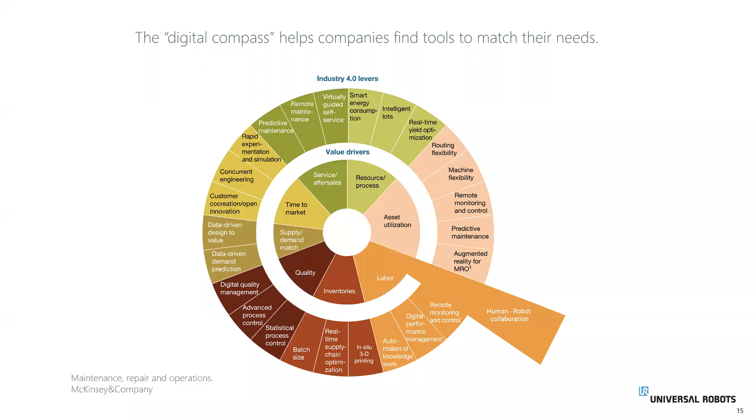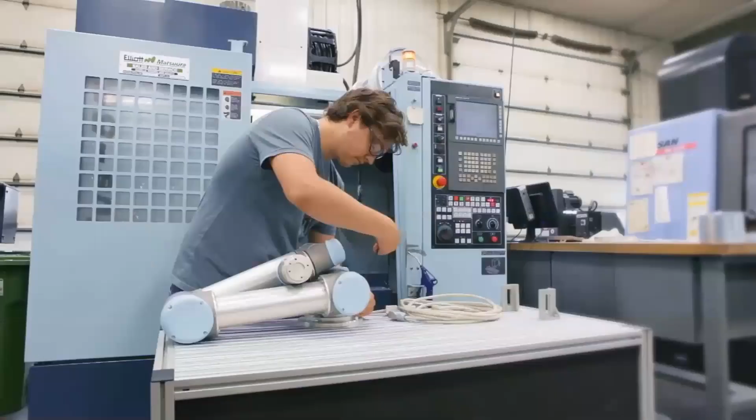Four bolts are required to mount the arm. These lightweight arms can be mounted on a wall, upside down, from the roof, or on the machine itself. A single cable runs from controller to robot base, providing power to the joints and communication. The controller operates on single phase power. You can select a range of end-of-arm tools readily available, as well as customized tools.

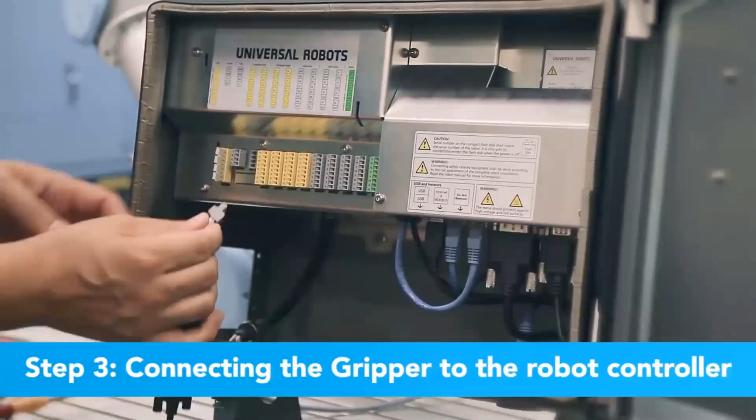The user interface is called Polyscope, and it is so user-friendly that anybody who can handle a smartphone can learn to use the collaborative robots. Easy hand-guiding based teaching, ready-made application wizards, easy navigation of menus, different access for operators and programmers, and safety auditors make the application safe to use.

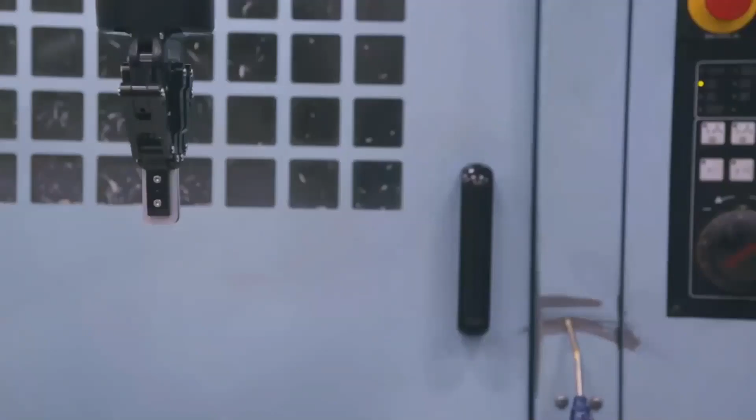So this video has given you a fair idea of how much time you need to implement a collaborative robot for a typical application like machine tending.

So when we say collaborative robots, you may have a question of what exactly we mean. Basically, cobots were created to share the same physical workspace as a human being, because cobots facilitate the idea of human-robot collaboration. The International Federation of Robotics defined 4 different levels of collaboration with robots: first is cell, second is coexistence, third is cooperation level, and fourth is responsive collaboration.

Let's take the first one, cell. This is the lowest level of collaboration, where a traditional robot is fenced off from humans and operates in its own separate workspace. Coexistence is the next level, where a robot is not fenced, but the human and robot both operate in their own dedicated workspace.

In the third one, cooperation level, robots and humans work on the same part or machine at the same time, and both are in motion. At the highest level of collaboration, which is responsive collaboration, the robot responds to the worker's motion in real time. Typically, traditional industrial robots can only work at the lowest level, while cobots allow for the highest level of truly collaborative applications.

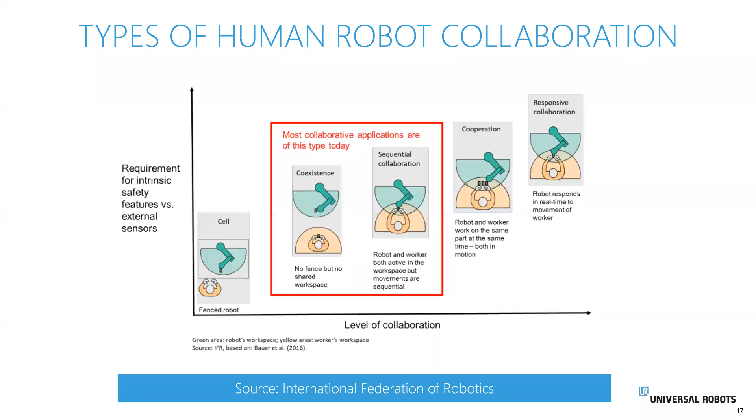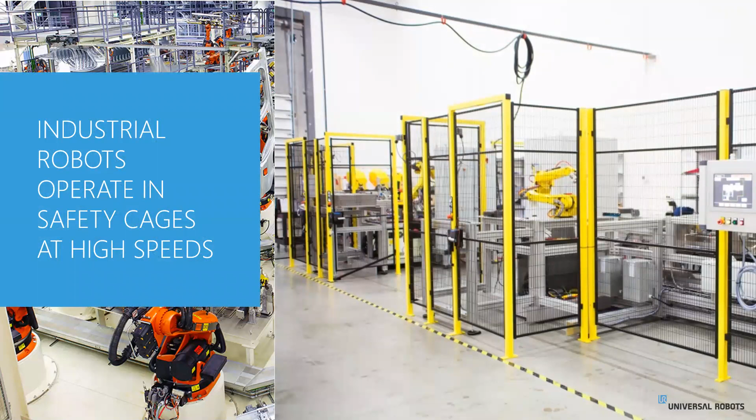As you may already know, these are traditional industrial robots. If you compare these to the cobot you saw in the video, you will notice a lot of differences.

First and foremost, you will notice that industrial robots operate in safety cages. They are bulky and take up tons of space on the shop floor, so you can only deploy them if you have space. Another aspect is user safety. Industrial robot cells are surrounded with safety fences, but men still need to go inside whenever a changeover or maintenance activity is carried out, and there itself the risk is present. Most accidents with robots happen when human activity is performed inside the cell, but this is not the case with cobots.

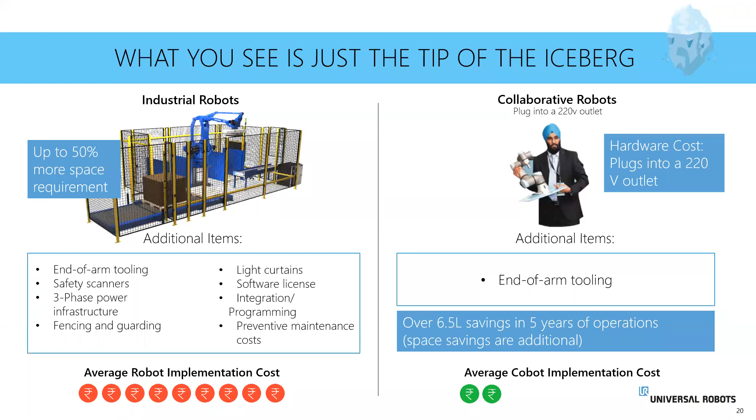As far as standards are concerned for collaborative robots, the only standard from ISO is ISO TS 15066, which is still a technical specification. ISO standard 10218-1 and 2 defines 4 different methods to achieve collaborative operation using industrial robots, and ISO TS 15066 defines the standard and guidelines only for collaborative robots. Going forward, ISO TS 15066 will become 10218-3, which is the industrial robot guideline for collaborative operations.

There are 4 different methods used to achieve collaboration using industrial robots. The first method is safety rated monitored stop. A traditional robot is used within a fence. When a person enters, the robot is paused. When the person leaves the workspace, the robot can resume automatic operation. Calling this method collaborative seems a bit odd, but the standards define it as collaborative because electricity is maintained to the robot motors while a person is present.

The second method of achieving collaboration is hand guiding, as part of the robot operation. The car industry has used this method for years to place seats inside the car and to hold bumpers while operators are doing screwing.

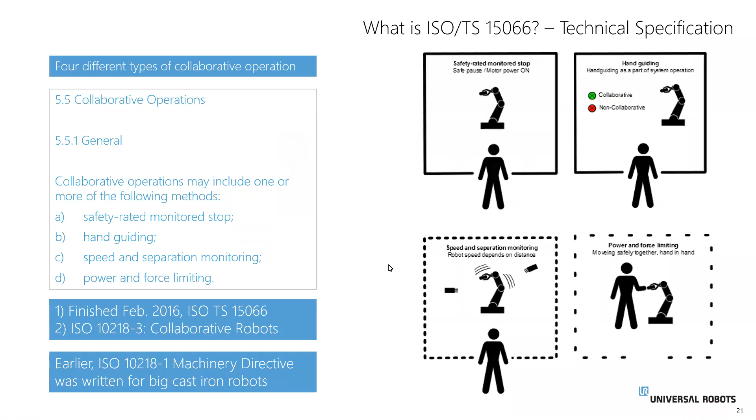Other than the ISO TS 15066 standard, UR cobots have a patented adjustable safety system which allows work at ease in collaborative operation. Functions like joint speed, joint position, TCP position, tool orientation, force, momentum, and power allow risk assessment of any kind of application.

The Universal Robot Safety System is tested in accordance with ISO 13849-1 Performance Level D and CAT3 architecture. All applied standards and certificates can be found in the user manuals of Universal Robots and on the website as well.

From the product line, Universal Robots come in two series, CB3 and the latest one, E series. CB3 has three models, UR3, UR5, and UR10, where 3, 5, and 10 stands for the payload capacity of the cobots. Whereas E series has 4 different models with an additional robot with 16 kg payload, which is UR16E.

E series has improved sensitivity with built-in FT sensor for process applications like polishing, grinding, deburring. Also, there are some other additional functionalities added in our latest generation of robots, which makes robot deployable for different variety of applications and also enhance the experience of the user in terms of easy navigation.

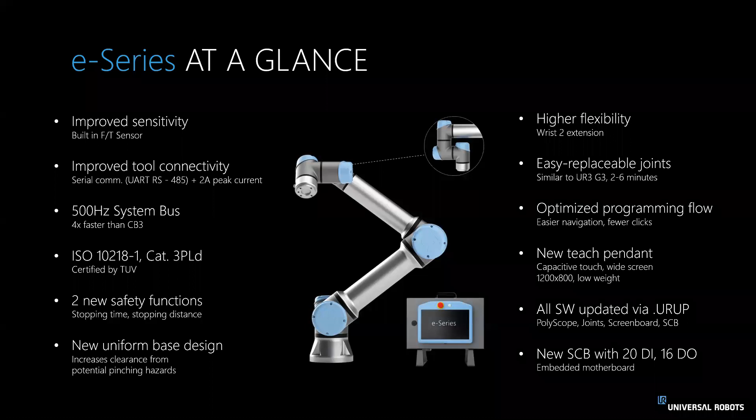17 built-in safety functions with stopping time and stopping distance functionality. And there are some other functionalities in terms of maintenance and application deployment as well. Universal Robots has set the standard for collaborative robots with fast setup, easy programmable robots, collaborative safety, and flexible deployment.

Let's see a short video on each of these for better understanding.

So you already have seen the setup video for Universal Cobots. Our cobots come in 2 boxes. One box contains the robot arm and the other one has the controller box. It takes approximately 1 hour to unpack the cobot, mount it, and program it for a simple task.

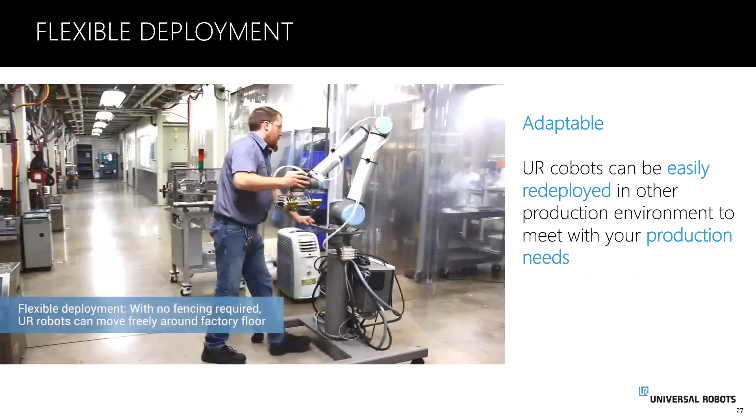You can see in this video how UR cobots can be easily redeployed in other production environments without changing the layout of the shop floors. This company has a fleet of mobile robots mounted on trolleys.

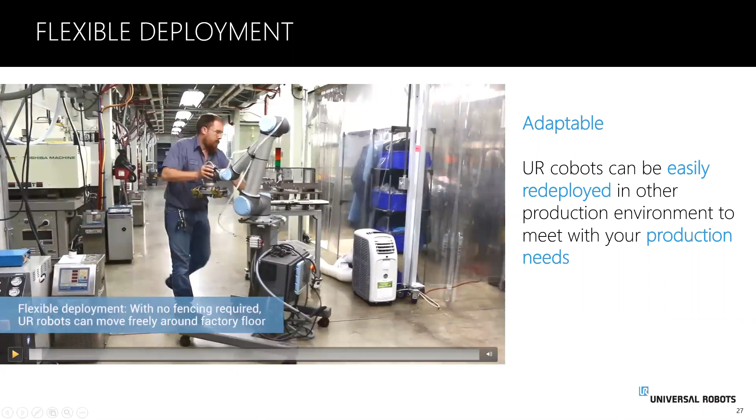Let me play this video once again. So this is the type of redeployment this company is using, mounted robots on the trolley system, and they are moving the trolleys wherever they want to deploy the cobots in different manufacturing setups.

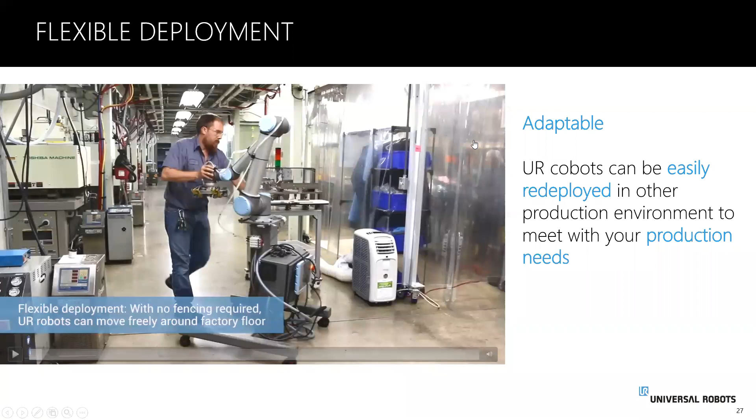This is a collaborative robot, also called Cobot. It's a 6-axis robot, can be used for multiple applications. Here we have the teach pendant.

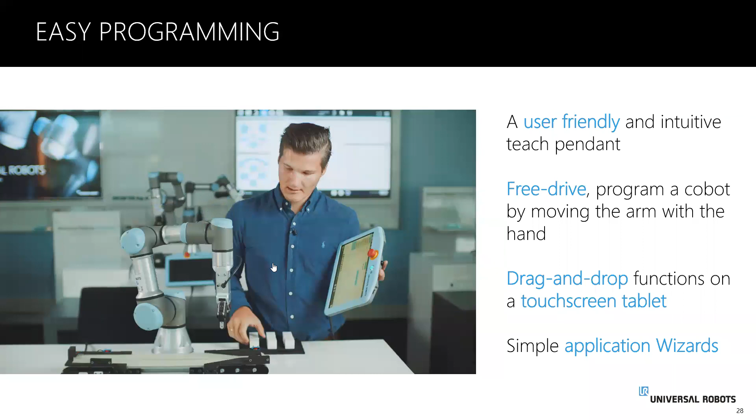On the teach pendant we also have a free drive button, which we can hold in, and then we can take the robot and move it into a certain position. We can also, in our program tree, take which function we would like and put it into our program. I have now made a small pick-and-place application that I will show you.

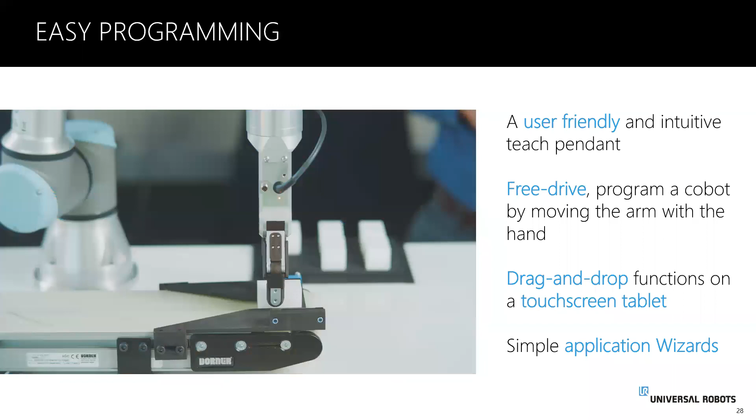So in the easy programming, Universal Robots has a user-friendly and intuitive teach pendant, free drive option to program the robot by moving the arm with the hand, drag and drop options in the touch-enabled teach pendant, and simple application wizards to develop an application directly out of the box.

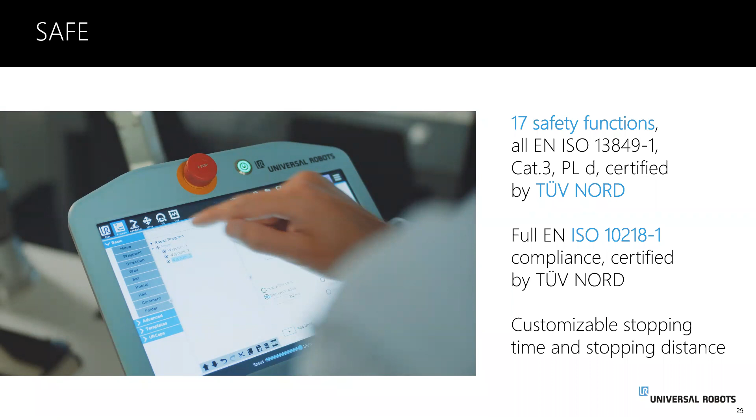One of the main advantages of cobots is safety. This cobot has 17 built-in safety functions. Among them is force limiting, which means that when the cobot is in action and I accidentally step in the way of it, it stops. And I can just start it again from that point in the program.

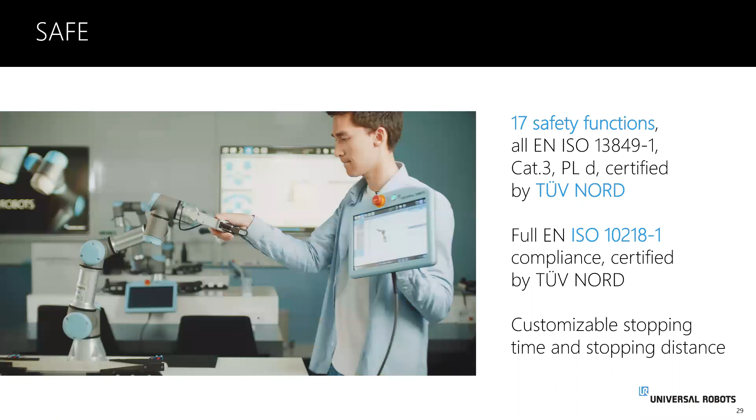Another feature is the safety planes, which can be set up to reduce the workspace of the robot so it can't collide with humans or equipment.

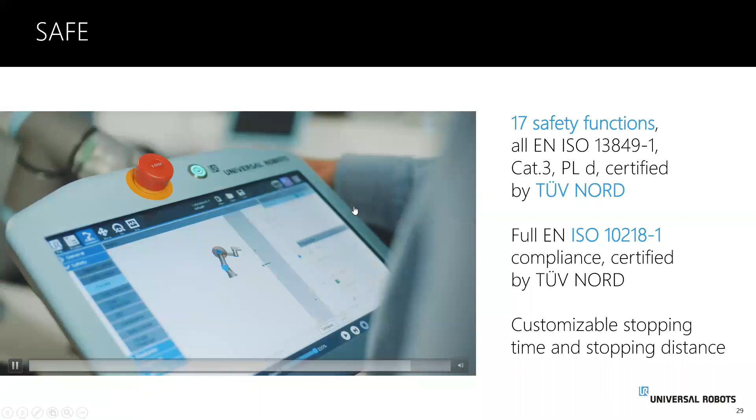For doing the risk assessment, Universal Robots provides 17 safety functions inside the robot by default with safety access, so only the safety team who has the access can make changes in these safety functions. These safety functions are always set to default values whenever a robot is shipped from the factory. After putting it into an application, you can set the safety functions as per your risk assessment enablement, right?

So by now, I hope you have noticed that instead of big bulky machines, our cobots are more like a tool that can be used to give a competitive advantage to manufacturers without any limitation for applications.

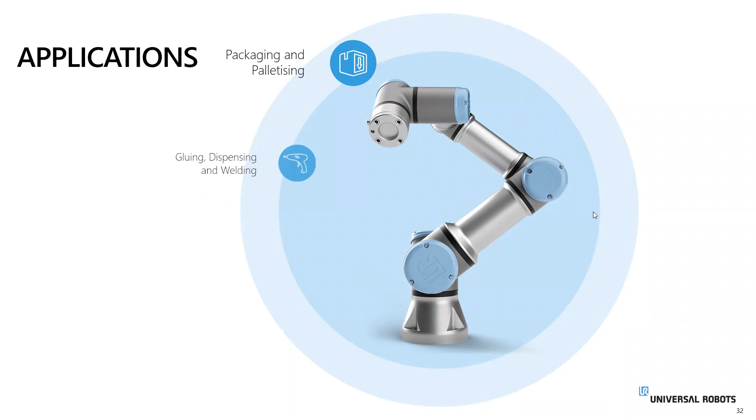From an application point of view, by simply changing the end effector, it makes your cobot versatile for various applications. Now I will show you examples of how cobots are being used in various applications, including assembly, dispensing, nut running or screw driving, inspection—this can be vision-based inspection—spray painting, and machine tending applications.

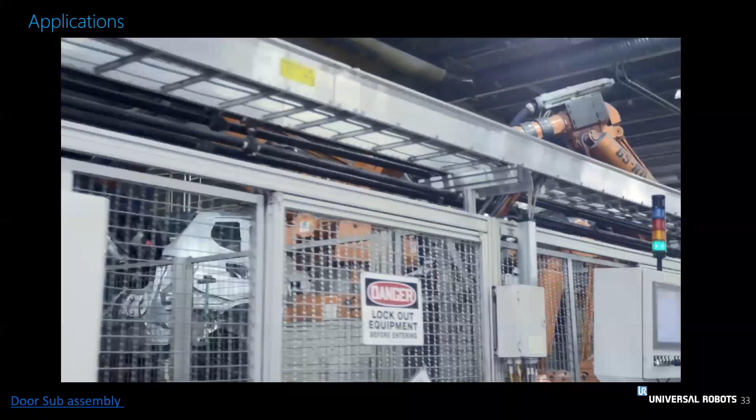At the beginning, it was strange. Such robots are usually separated from us. And one day, it was right next to me, my new coworker. I've never had a coworker quite like this before. In the past, I did that by hand. I needed incredible precision and always the exact same pressure to get it all perfect. It's amazing that we work with such robots, even on an assembly line, side by side and hand in hand.

This application shows true human-robot collaboration, where cobots share the workspace and make sure the operation is completed with the same precision for every cycle. You can see the video and the application. These types of applications were not getting automated earlier with industrial robots, because they need safety caging and separation of workspace from human operators. So for these applications, you'd need to either compromise on quality or use highly skilled labor. With the enablement of collaborative automation, you are able to automate these kinds of applications without changing much in your existing assembly lines.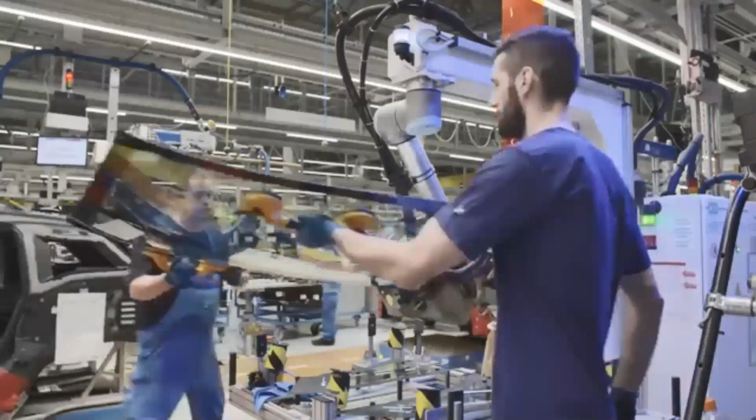Let's take another video. This is an example of zero footprint glass sealant dispensing, where operators place the glass and an upside-down mounted robot dispenses the sealant on a pre-decided profile with precision, taking minimum space on the shop floor. For these types of applications, Universal Robots are equipped with features like constant speed at TCP motion and direct 3D-to-path program creation, so you can directly import the profile of the glass, select the path, and the robot program is created directly.

You can compare these types of deployments with the existing conventional deployments you must be having in your factories for these types of applications, and see how much space collaborative robots are saving, as well as how they work hand in hand with the existing setup.

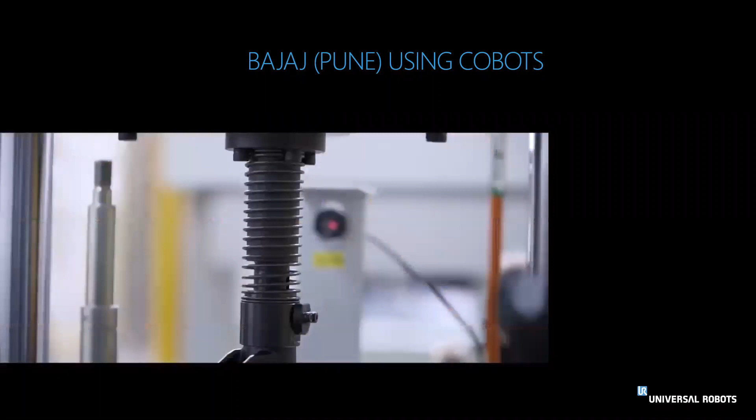The cobot is doing the sealant dispensing.

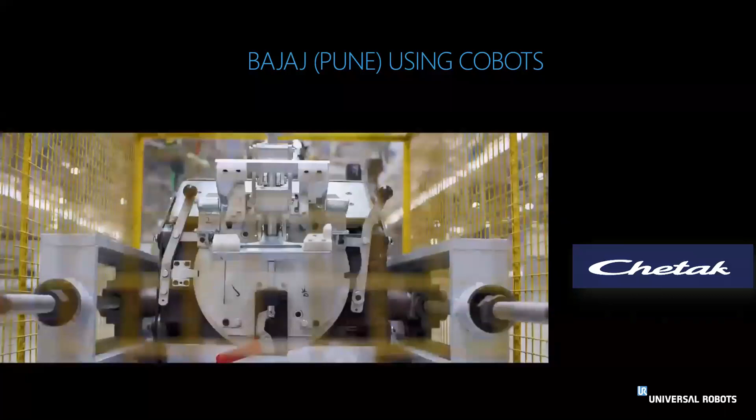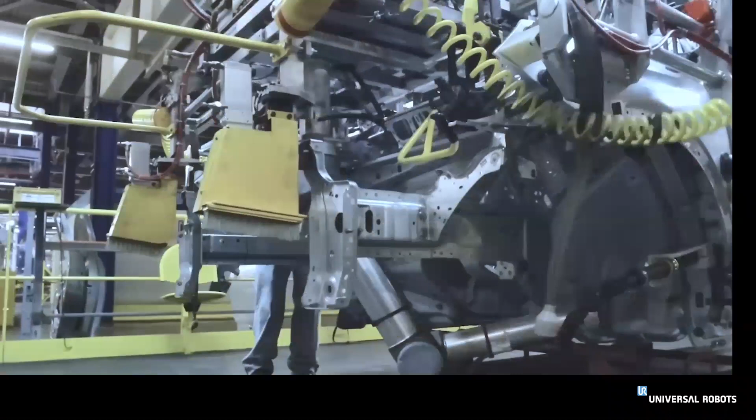This is the video from FCA Automotive. This is an application area which is ergonomically tough for human operators. Other than handling the high torque nut runners, this is again an ergonomically tough location for the operator to bend and do the nut running.

The application requires underbody nut running on a moving assembly conveyor. You can see the lightweight cobot mounted on a jig suspended from the top. An operator pulls the jig and engages it with the car body, then hits the start button and the cobot starts its job, while other operators also do their assigned jobs in parallel.

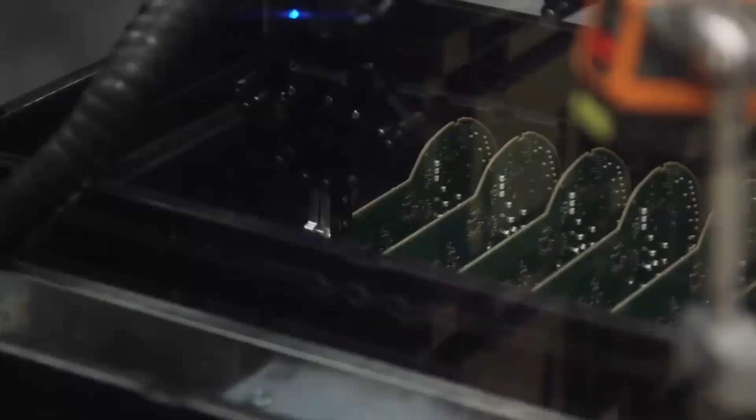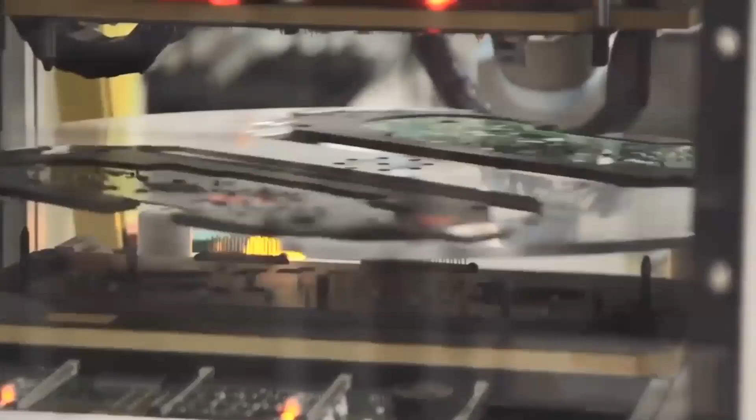Since all programming is within the robot, there is no programming logic outside. All the electronics, robot controllers, and PLCs are integrated into the central control box, and Profinet is used to communicate with all stations. This means that any modification can be performed by us, as the programming of the robot, which is the central part, is done in-house.

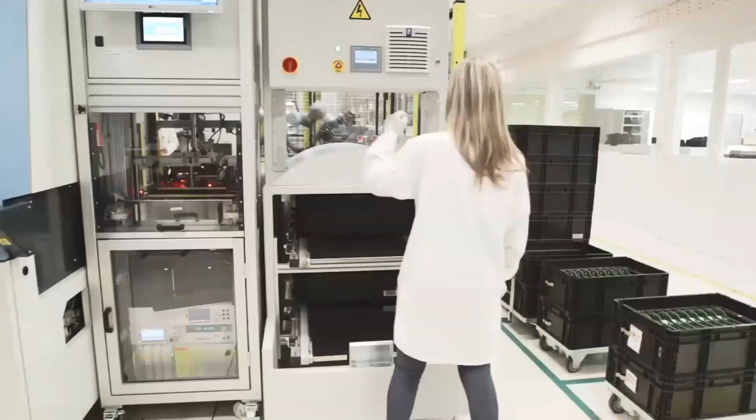The second benefit is changing the operator's role on this type of line, as they do not perform tasks without added value, such as moving a part from one station to the next, as this is done by the robot. This way is also much more economical than the traditional system of transporting products from one machine to the next. What's more, the operator can now access the line at any time without stopping the robot.

So far, this is the safety concept that we have implemented.

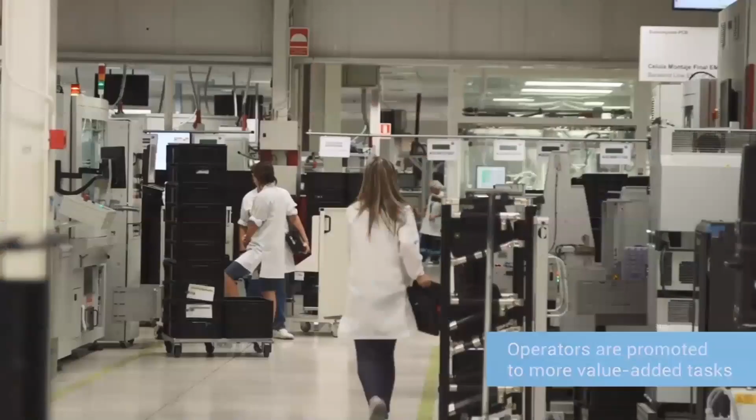This line is already in production, and we have started another project based on the same solution, but this time with 3 UR10 robots.

Our main challenge in our company is productivity. We are very much challenged in automotive with productivity. For me, collaborative robots are really a key solution for that. It will really help us to continue to grow.

So you must have seen in this video how the UR10 robot, the longest reach cobot from Universal Robots, is getting used without any fences, and it works alongside human operators. So this is the case story from Continental, Universal Robots global account.

Similar to Continental, we have Ford, Fiat, Valeo, Renault, Faurecia, etc. as our direct global accounts. They identify the projects, they buy the cobots, and they are trained to deploy the cobots in their different projects by themselves.

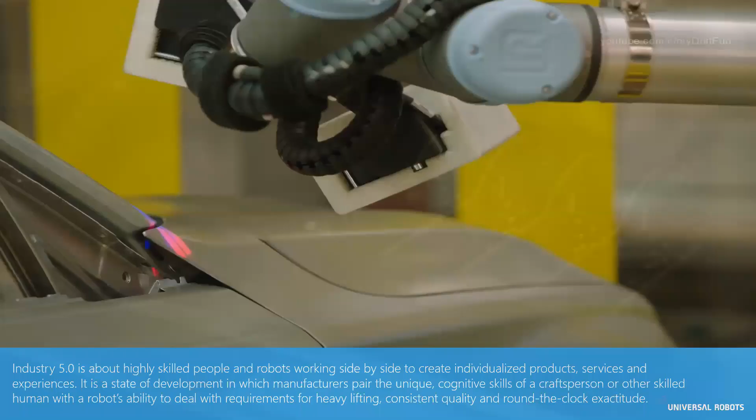So this is again a video of vision-based inspection. This can be a multi-point inspection and also an entire profile inspection. Here in this video, cobots are being used for the gap inspection of doors on BMW cars to ensure the highest standard of consistency and quality that you expect from a BMW.

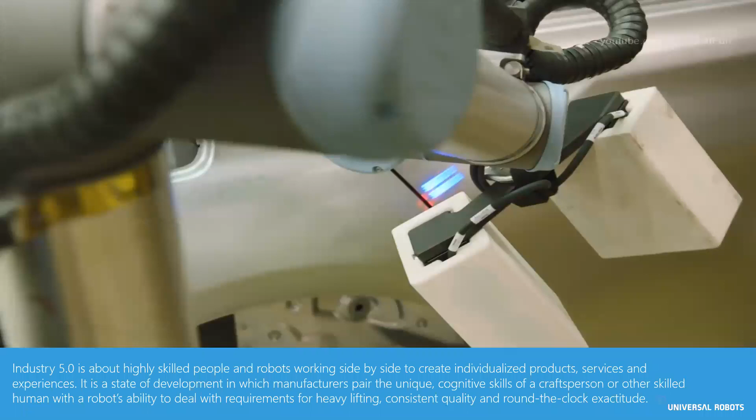However, you will see the cobots are not alone. There are also humans working between the cobots to check that everything is running smoothly, and robots are checking the gaps based on laser and vision system feedback, while the operator is checking the gaps based on mechanical gauges.

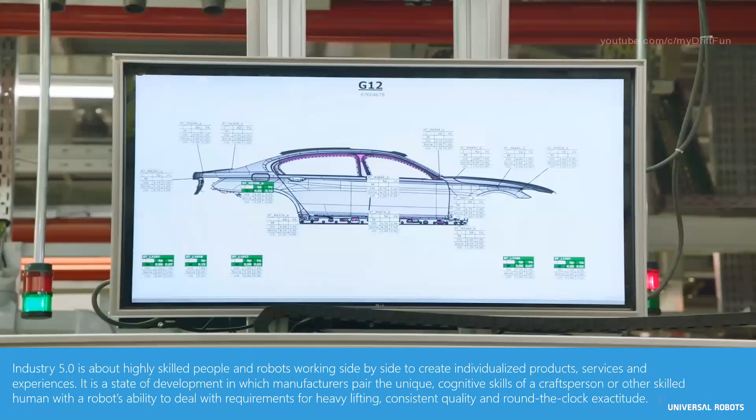There are 4 robots deployed for this particular application. After the inspection, the results are displayed on a screen, showing whether all the results are okay and within the tolerance limits. These type of applications are getting very popular nowadays in the automotive industry.

We have seen in several years there were some recalls because of some loose fitted or wrong fitted parts. So there are several steps taken in the automotive industry for doing inspection, and now inspection is shifted from manual inspection to robotic or vision-based inspection. We have done these type of applications in various plants in India as well, on vision-based inspection of jobs.

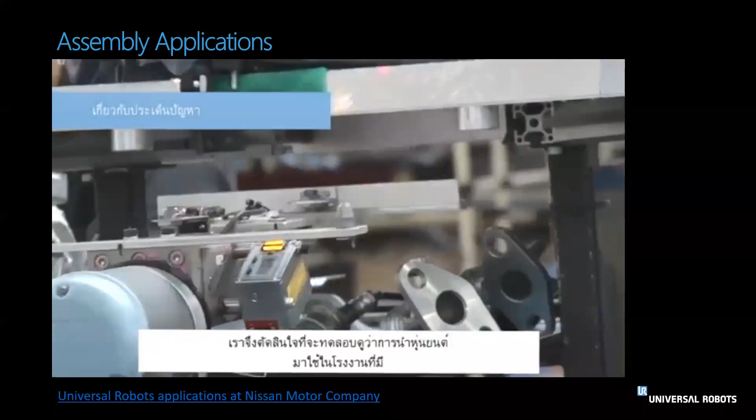So this is a video from Nissan automotive assembly lines, where you can see the robot is not doing any application, but the job of the robot is to present a component. I will play the video again.

So the job of the robot is to present the component in the correct orientation to the operator, so that the operator shouldn't be bothered about moving the heavy parts, and can still focus on doing their best. He's taking the part in the correct orientation. The same orientation part is going into the assembly, and this is the job of the robot here.

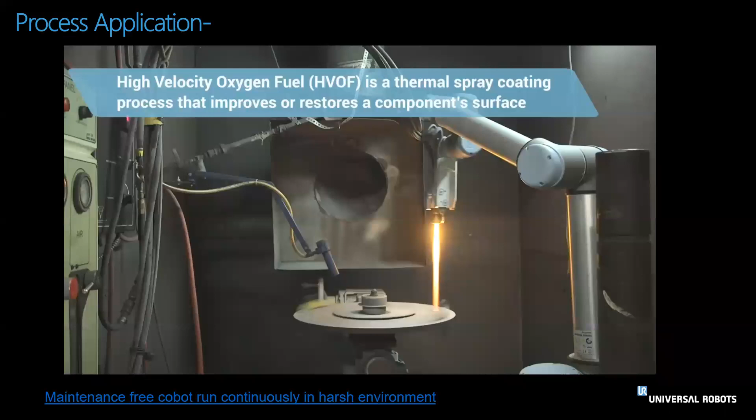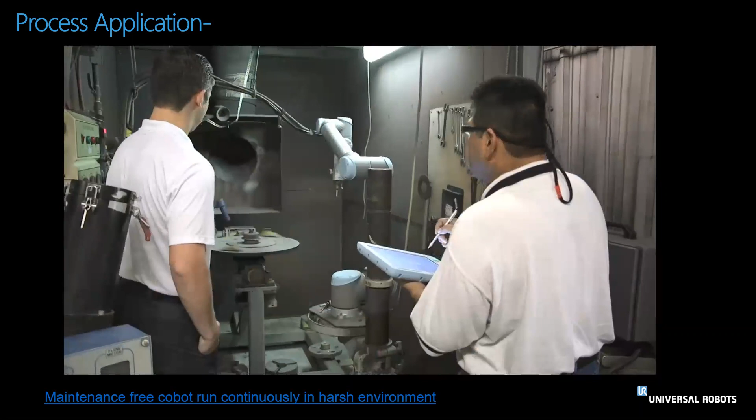The process of HVOF is a high temperature torch that accelerates the powder stream. The plasma gun, which is opposite of the HVOF, is used to get a denser coating, which involves a hotter flame. We weren't sure of the temperatures. We really didn't know till we got it in there and started using it. I thought it wouldn't stand it, but it did, which is still surprising to me how it would stand.

So this is the application, like small tool room type applications where robot needs reprogramming more frequently. Each and every job is different from the last one, and you need to program the robot differently for each job. These type of cobots are helping in maintaining the quality.

This video I put together to show you the environment conditions applicable to the cobots. This particular environment is considered a harsh environment for the application as far as operators are concerned, but robots can work in these applications, and they are designed to work in these type of applications.

As far as cobots are concerned, they are designed to work with humans, and they also work in the same type of environment. Whenever we put them in an environment which is not suitable for operators, we need protective gears for the operators. Same way, cobots also need protective gears sometimes. Whenever we are putting robots in a highly dusty or highly humid environment, we need protective jackets for the robots.

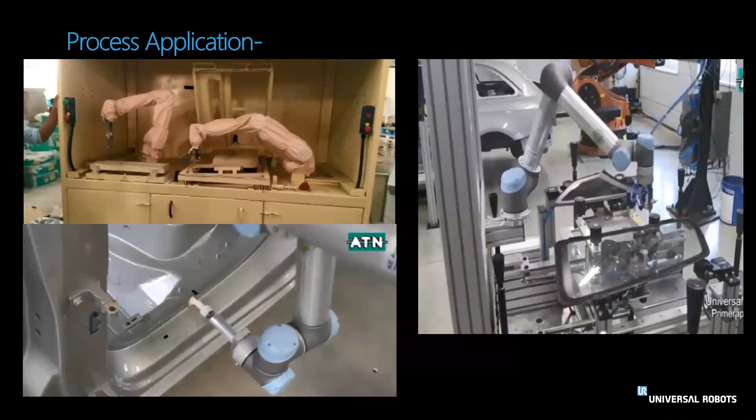So the picture on the left, the first picture, shows the application where robots have been covered with protective jackets. These are consumable protective jackets, and the application here is spraying of adhesive. So to stop this adhesive accumulating on the robot arms, they are using consumable type covers. The second application is again a chemical application, and the third one is glass sealant dispensing applications.

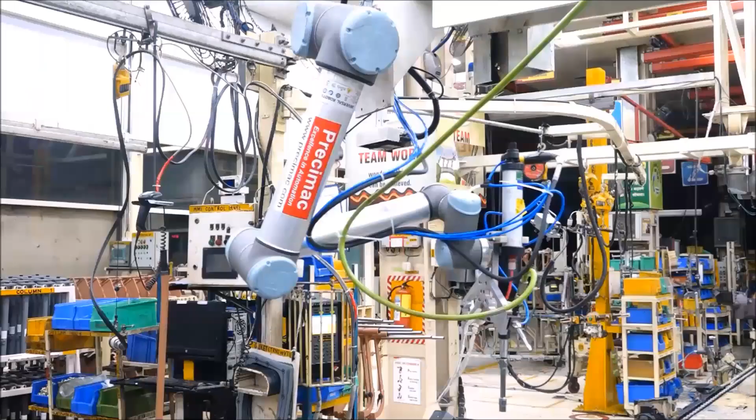You can see in this video, the robot is hanging upside down and it has 3 different tools. Using these 3 different tools, the cobot is performing 3 different actions. The first action is to tighten the bolts on the chassis on an assembly conveyor, and then dispense the sealant.

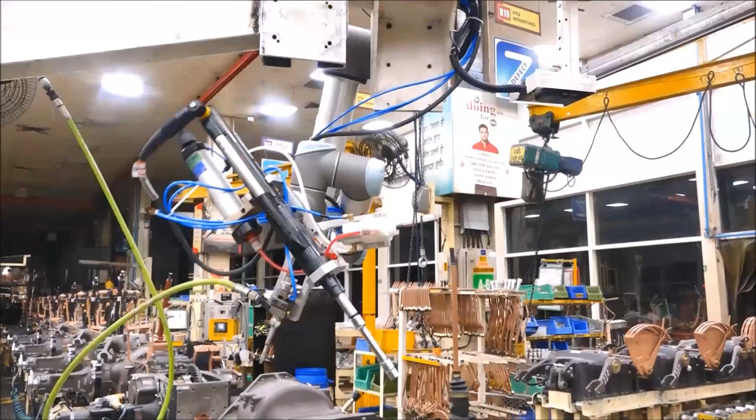Another application of this particular cobot arm is to dispense the thread lock before putting the bolts. So you can see the same robot arm, depending upon its payload capacity, can be used for different types of applications. So for different types of applications, the capabilities in software are already present, and we are giving different types of application wizards in the arms.

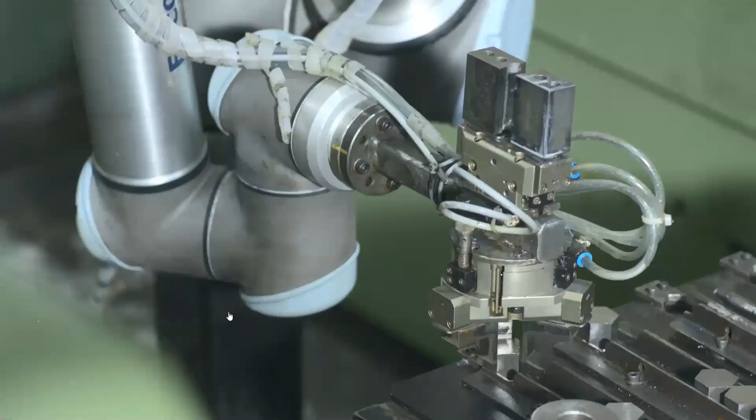I still remember when I saw the cobot for the first time, I told my dad, this is what we need for our components.

We have 2 divisions: a small component division and a big component division. And for the small component division, I think there's no better robot in the country than UR cobots.

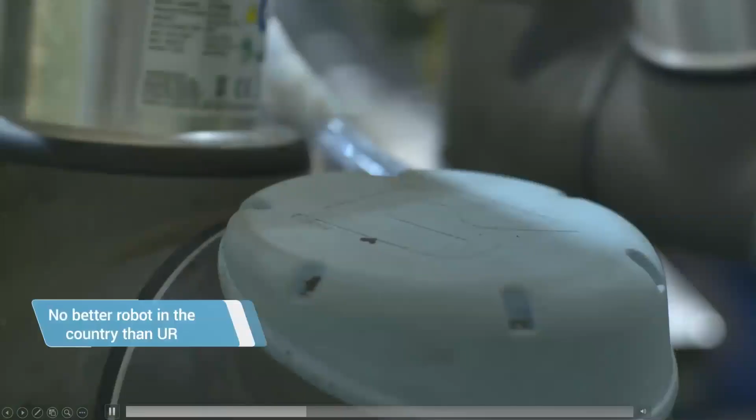When you're an SME, land is extremely valuable for you. Imagine putting huge robots in your factory which take up so much space — you need to put a fence around them. Instead of 6 machines, you would only be able to put 2 or 4 machines at max. But in case of UR robots, it can fit into the space between 2 machines that you already have in your factory. You just put it there, plug and play, and you're good to go.

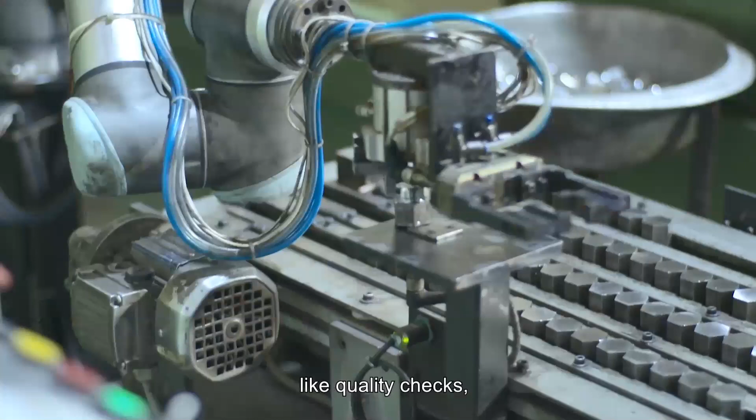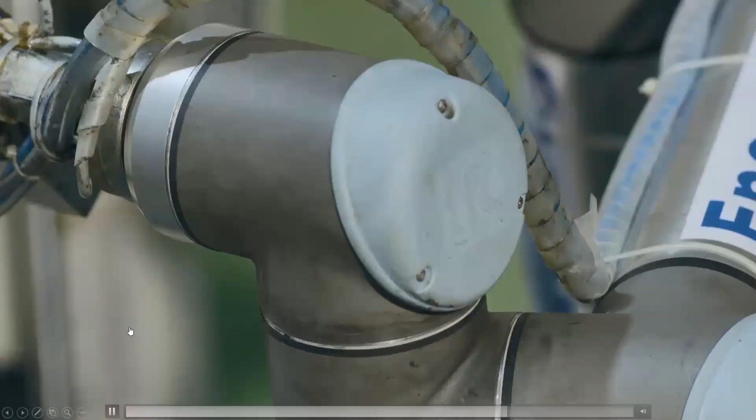They are actually cobots, collaborative robots as you call them, which work side by side with my workforce on the shop floor.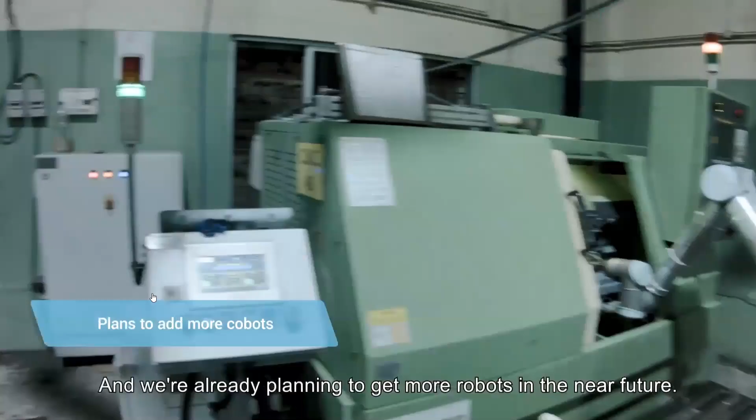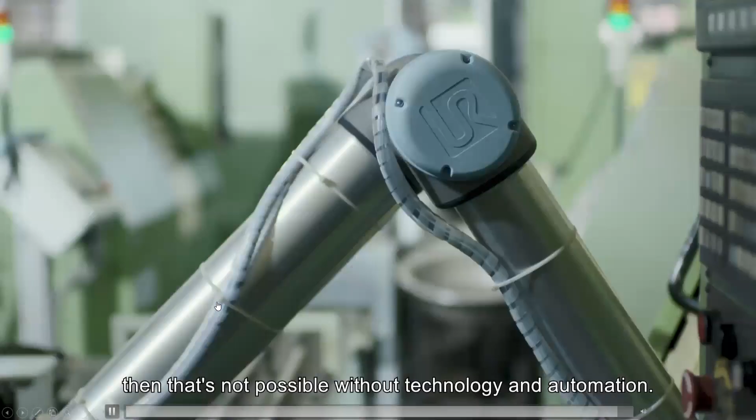So this was the case story from one of the SME customers who is located in Jamshedpur.

I think this has given you a fair idea about cobots getting used in machine tending applications, where within the same layout where earlier one operator was loading two different machineries, or two operators were loading two different machineries, the same activity can be done by a cobot mounted in between the two machineries.

Not only in automobile and FMCG, universal robot arms are also very popular in non-conventional applications. Cobots are also getting used in making dosa and omelets in restaurants. Cobots are acting as co-pilots. Cobots perform the job of a cameraman here in this picture.

So all these applications are only possible because of the ease of use, easily redeployable features, the flexible robot arm, which has almost all the joints with flexibility of 360-degree plus minus motions, and all the safety features which cobots present to the integrator.

So these are the links for some of the automotive industry applications. We deployed our robots for multiple different applications.

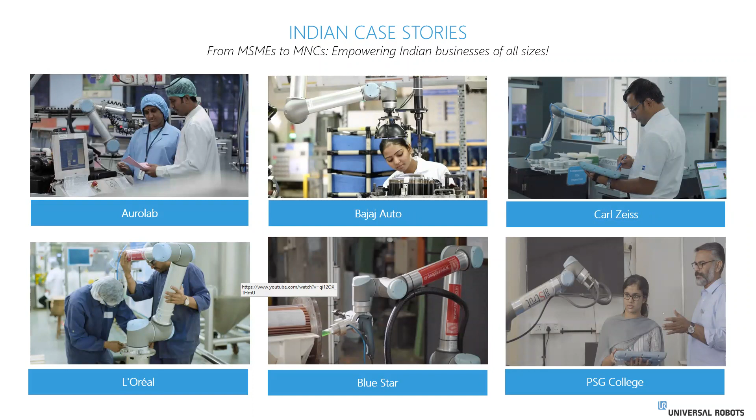As you know, the mission of Universal Robots is to make automation easy and accessible for small scale companies too. In this slide, you can see some of the SMEs and even MSME customers in India who have been able to use this revolutionary technology with ease on the shop floors. Some of these companies have only a manpower of 10 people and very small shop floors. Still, they are using and deploying cobots, and they are benefiting from collaborative automation.

The next video is from the Mahindra and Mahindra plant and will be the last video of today's session.

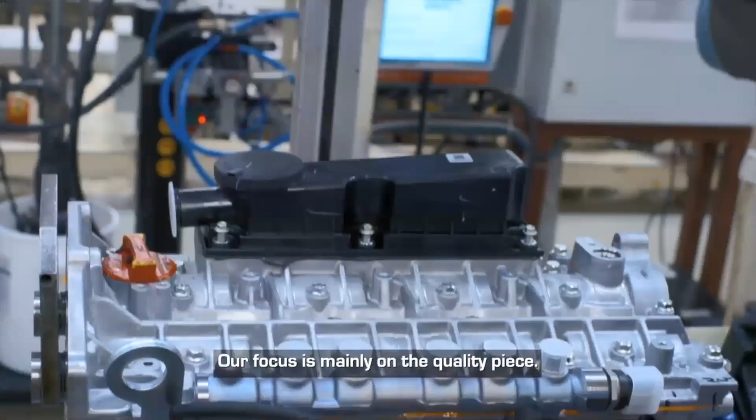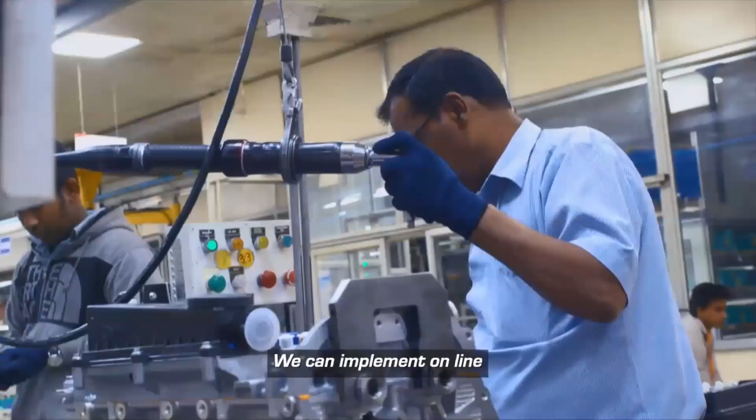A lot of disruptions are happening in the auto industry. To survive, we need to do continuous improvement, do better than what we were doing yesterday. I have been working here for the last 25 years. Our focus is mainly on the quality piece. Whichever is critical to quality, we want to automate it. One of our team members gave a thought: can we go for a collaborative robot? We can implement it on line and it can work with our associates.

It's not only the sealant application or the tightening application. There is a camera which checks the quality and it gets recorded. We are able to real-time monitor the cobot performance also. It is very safe, easy to teach, very flexible. When the cobot is working with them, people are loving it.

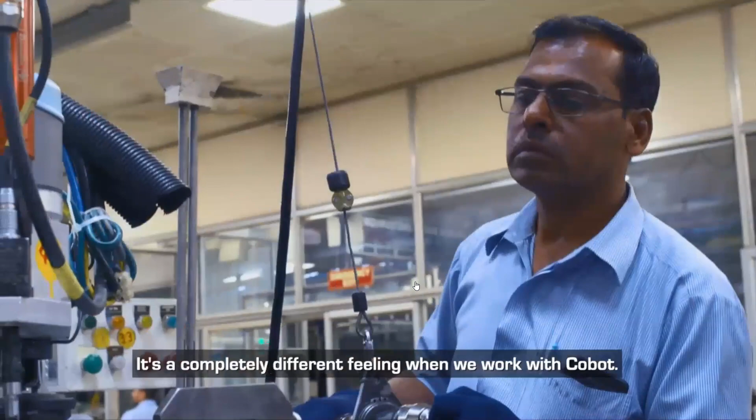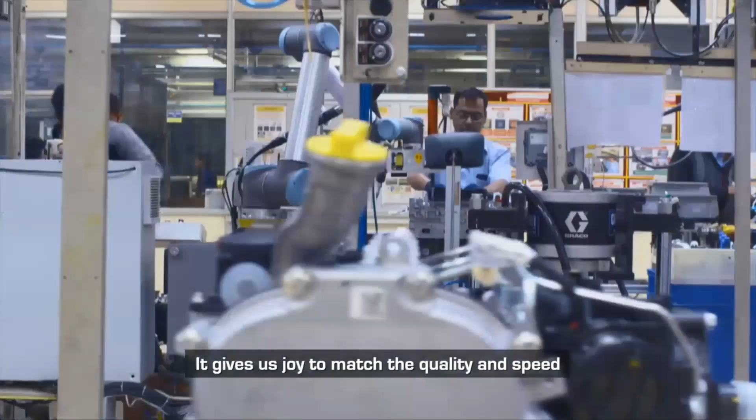Going forward, we want to explore how we can implement cobots more and more. The future is enormous. We all have to continuously improve with respect to what we were doing yesterday.

So this video basically displayed the different application deployability of a cobot. In other videos also, you have seen a single cobot arm doing multiple activities. In this particular application, a camera is also implemented to offset the path of the program and also to check and do the inspection of the profiles and the bolts.

Now we will get into our Universal Robots Plus ecosystem. As you know, any robot itself is a partial machinery. We need to add it with a tool, interface it with a machine, a conveyor, or a vision system. These are the accessories required to prepare a full solution.

Basically, the UR Plus ecosystem is a platform of third-party created products that are tested and certified to work with our cobots. The idea is to make automation even more easier and time-saving for you. These are all plug and play, and you can produce instantly.

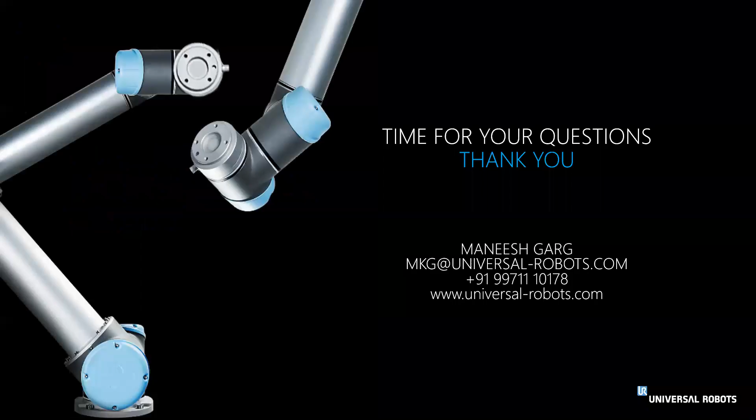So with the belief of UR in making robot automation accessible, safe, and easy to use for all levels of industries, we are good for taking the questions now.

So there is a question coming, there are 3-4 questions on the same application. Have cobots been used in arc welding applications? As I said in the webinar, there is no application limitation as far as the cobot arm is considered. We have used our robots for arc welding applications as well. You can directly mount a welding torch on the cobot, and MIG welding and TIG welding type applications can be done by a cobot arm.